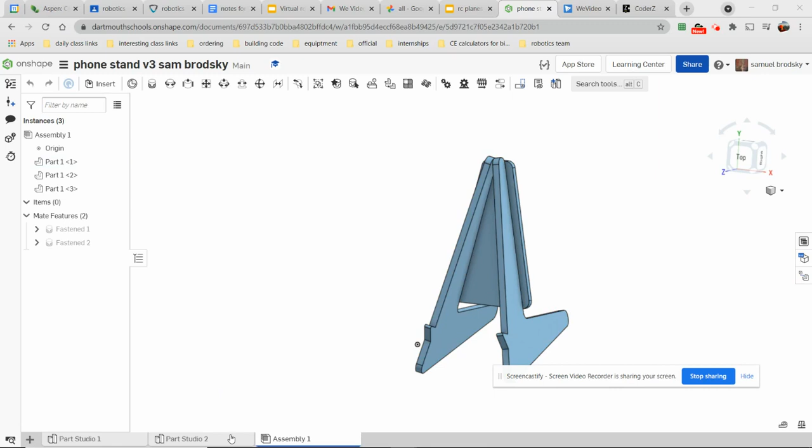So I'm going to go through how to take this phone stand that I designed and transfer the file over to VCarve so that we can actually make it cut. First thing I have to do is find the sketches. Right now I'm in the assembly. I have different parts here, Part Studio 1 and Part Studio 2. You could have drawn these all in Part Studio.

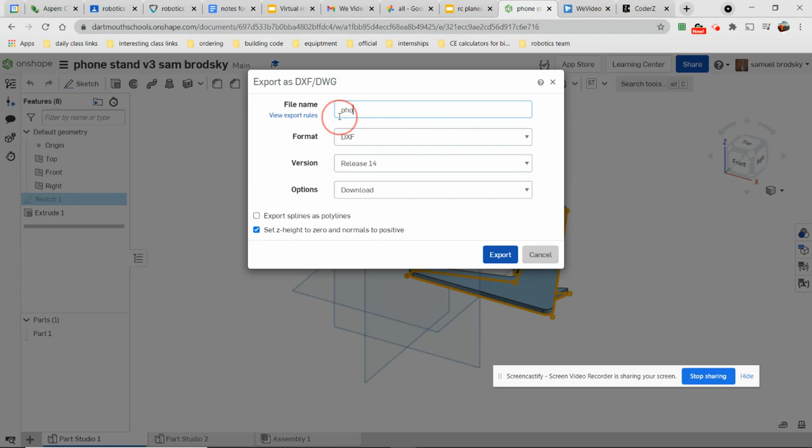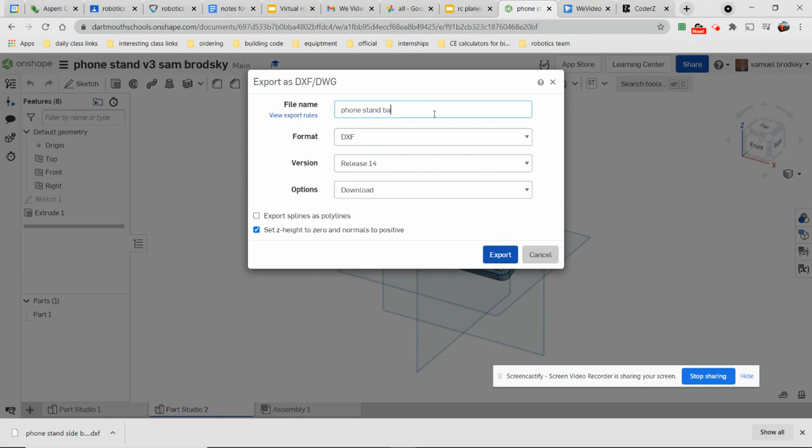Here's my sketch. I'm going to right-click on that sketch. I'm going to export that. Make sure this is a DXF. I name it. This is phone stand side Brodsky, and I will download that. Next, I'll go to my other part, and I will export that sketch as back. Make sure that's a DXF, and I will export that.

So now I have those two sketches that I've exported, and it's time to put them into VCarve. VCarve is this program here. And I'm going to create a new file, and this is where we put in the size piece of wood we're working with. The maximum size, which you should use here, 24 by 18, and then the thickness that you choose for your particular piece of flat pack furniture or flat pack object. Mine is going to be 0.22.

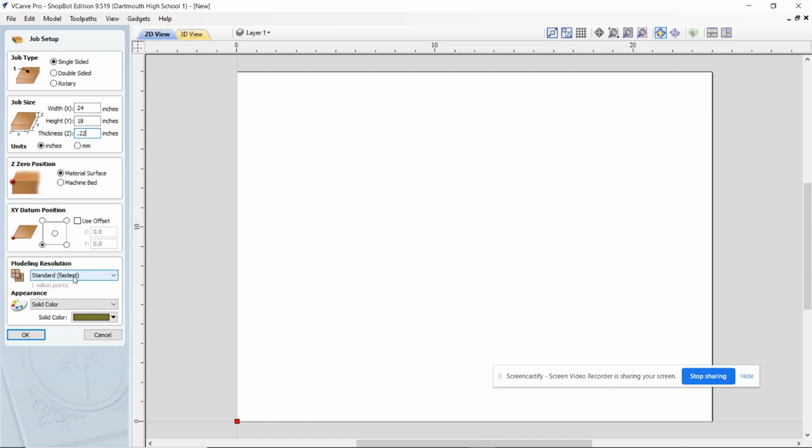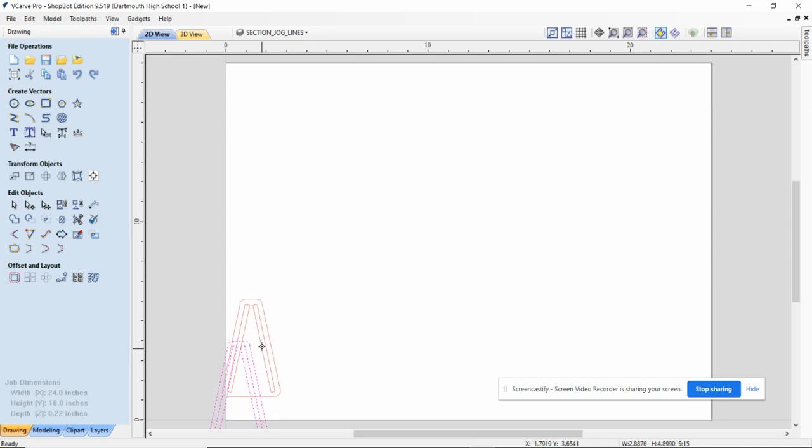The Z0 position is going to be the material surface. The XY datum position is going to be the lower left. This should be standard, and there we go. That's the basic piece of wood that we are going to be using. Now I'm going to import my sketches with this button here. First, I'll put in the back. It's going to give an error, but I'm going to just say, don't worry about it, and pop that in. Now it's in the wrong place. It's not on my wood, so I'll just double click on any one of those dotted lines and drag it somewhere where I can use it.

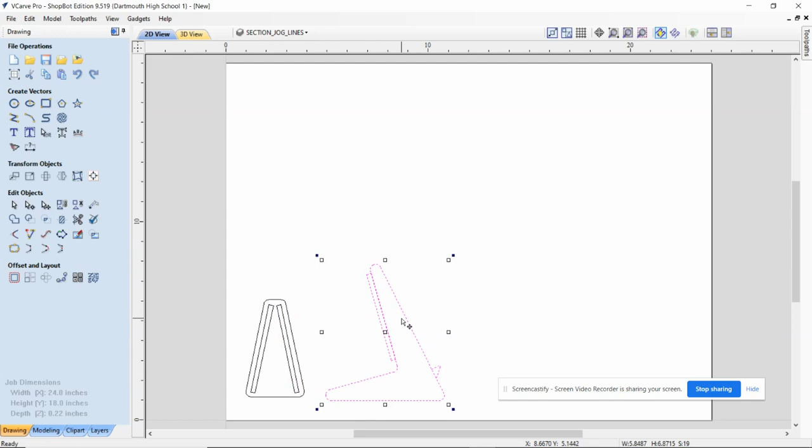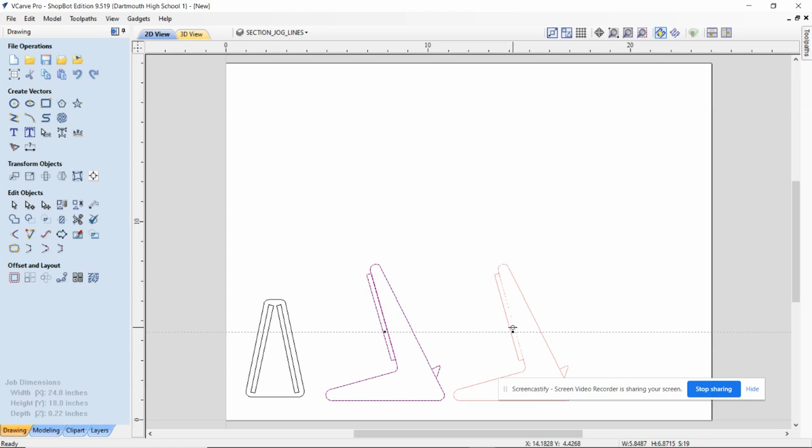Next, I'm going to import the next thing, which will be my phone stand side. Again, the error, again, I'll say OK. Double click on it and drag it over here where I can keep it out of the way of that one. Now, I need two of these. So I could import it again, or I could double click on this, right click on this, copy, and then paste. Now it pasted right on top of the other one, so I have to grab it and drag it off to the side. All right, so now I have my three pieces that I'm going to use to make my phone stand.

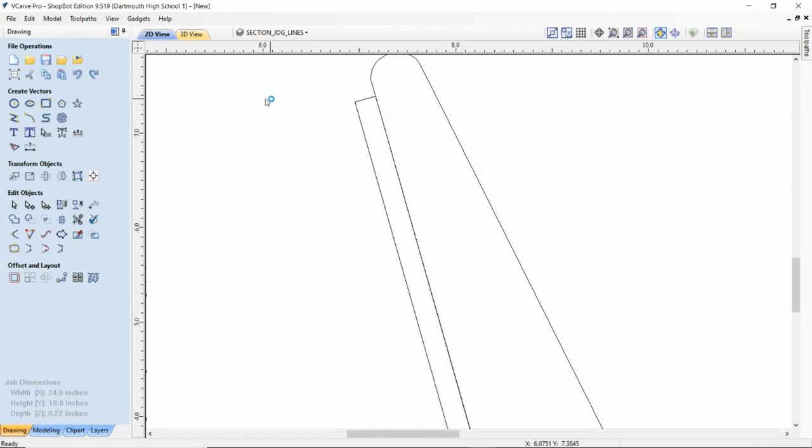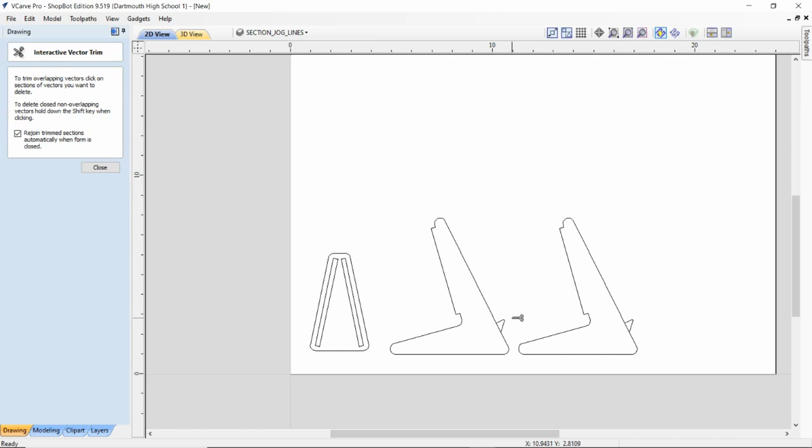Right now, they came in as separate lines because that's how Onshape drew them. What we need to do is clean this up and connect them. We don't need a separate line here. So I'm going to use the scissor tool, trim tool, and trim this line away. There were two lines, I had to trim them both. 1, 2. And when it did that, it actually connected those pieces to here, which is really useful. We still have to connect everything together. Scissor tool again, because I have to get rid of this little line and this little line. Anything that's not getting cut by this machine has to disappear.

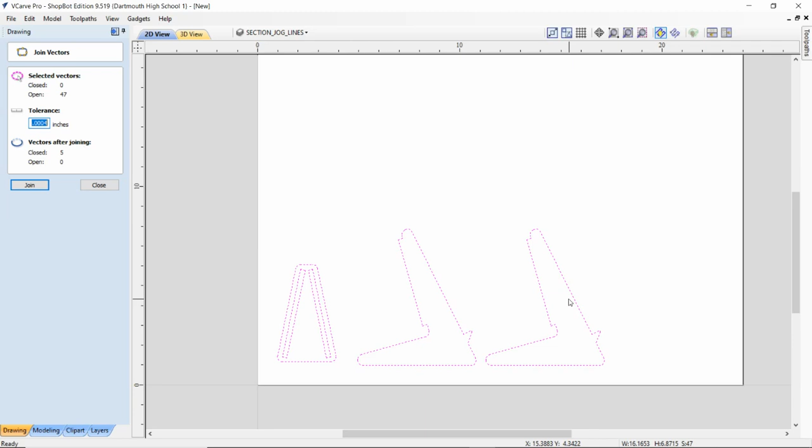All right, now I'm going to connect them all together. As I noted, they're all separate lines. What I have to do is select everything. I could do that with a big box, or with a Control A. And I'm going to use the join vectors. Initially there are 47 vectors. Once it closes them, there'll be 1, 2, 3, 4, 5 vectors, the vector being a continuous line. And now they are all closed, so I can't trim anything anymore. Now if I click on them, you see it's like one big piece. One big piece, one big piece. One hole and another hole. Very good.

Now it is time to start thinking about cutting these. So I'll click here to get over to my Toolpaths tab. The first toolpath I'm going to cut is this slot right here, so I'll use a pocket tool for that. I'm going to cut 0.27, which is deeper than my material of 0.22, which is correct. That way I'll cut right through it. And I'm going to use a 1/4 upcut wood bit. That's a perfect bit. I can select right there.

Don't change any of these settings unless I tell you to. Ramp on the plunge down is usually a good idea. Probably not necessary here, but I'm just going to leave it alone. Now I have to choose what I'm going to cut. So I'm going to click on this. I want to click that one too. In order to select them both, I will hold down the Shift key while I click the second one. And I will name this toolpath slots.

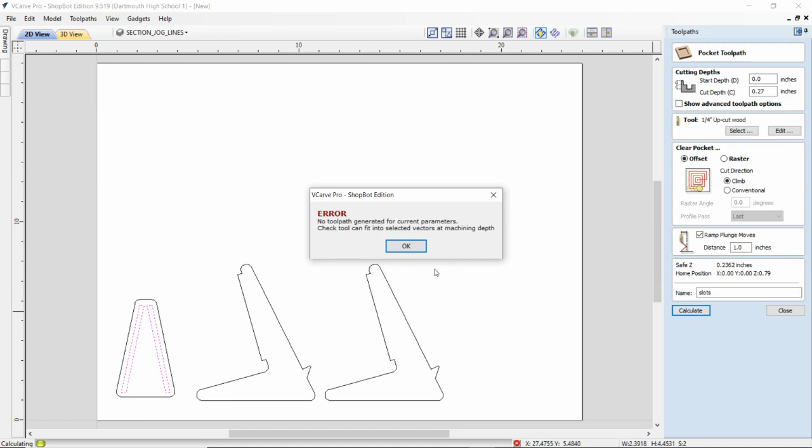Okay, so here it gave me an error. Let me try that again. The error is saying the tool can't fit into the selected vectors at the machining depth. I'm trying to cut a slot that's 1/8 of an inch or 0.22 across, and I've got a tool that is 1/4 inch wide. So instead, I'm going to actually select the 1/4 inch, 1/8 inch upcut wood.

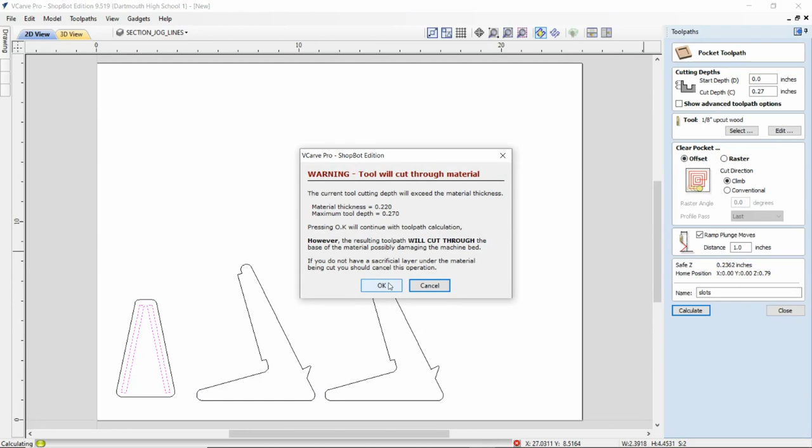And now I'm going to calculate. It's going to say, "You sure?" I'll say, "Yeah, man, no problem." So now I can preview these selected toolpaths. There we go. That's perfect. I will head back to my 2D view.

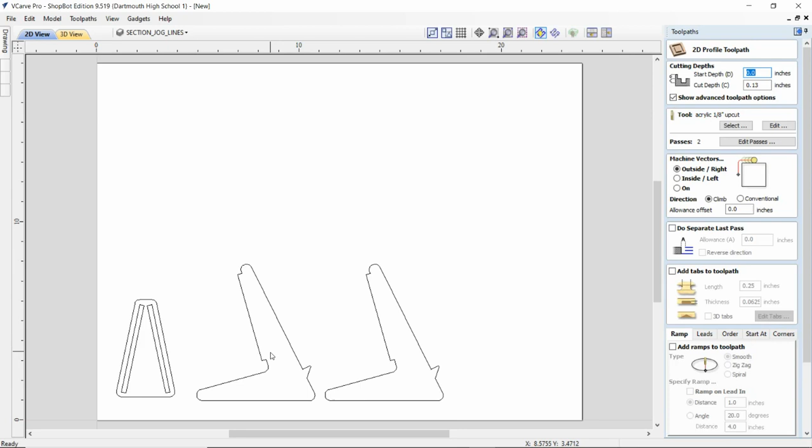And now it's time to create a toolpath for the outside. So I'll close my preview, select my 2D profile toolpath. The profile toolpath cuts the outside. The pocket cuts the inside. I will shift select all of my outside parts. And I will, man, I had the wrong tool there, I think. Yeah, that's the wrong one. I want the 1/8 upcut wood.

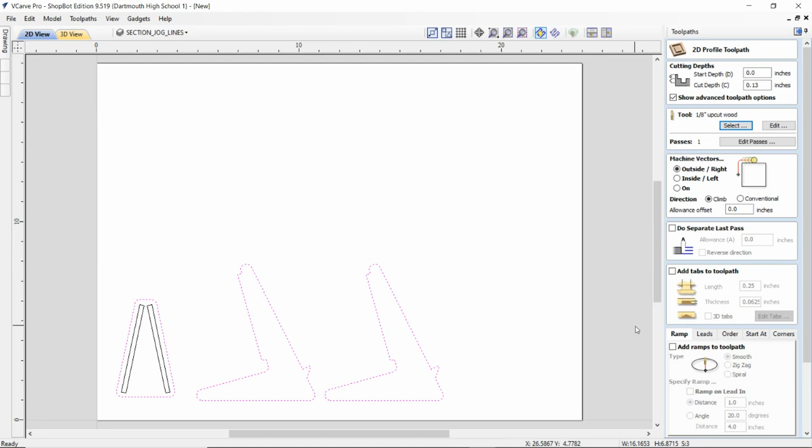Now the problem is, I guess I can just leave it in the 1/8. I could switch over to the 1/4, but it's not that big a deal. We don't need advanced options. We are going to cut on the outside. We will ramp our plunge moves 1 inch. We are going to need tabs.

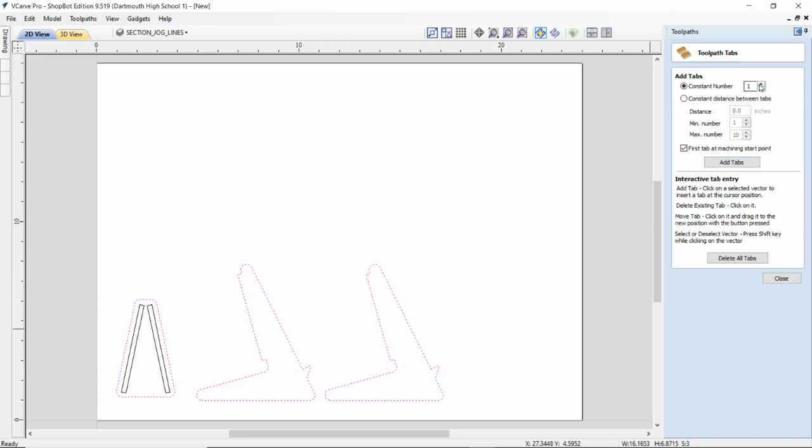The reason we need tabs is that otherwise, as the machine cuts out the piece, it'll start moving around. It will destroy the piece, and it may crack the bit. So we're going to add some tabs. 3 tabs is good for wood. Press add tabs, they'll pop in. If they're in a bad place, you can move them here and resize them, but I think they're fine where they are.

All right, I'll close that. And this one will be the outside cut. Calculate that. And I'll preview them all again. Uh-oh, it didn't cut all the way through. Let's check what I forgot. Outside. It's an outside cut. And I only cut it 0.13 deep. I need it 0.27.

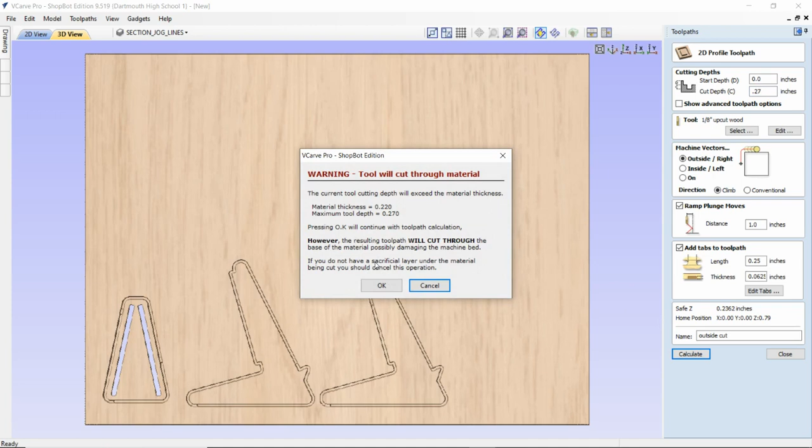And I will now calculate. Oh my gosh, do you really want to go all the way through? Absolutely. I can reset my preview, and I can preview all the toolpaths. And there we go. It's cut all the way through. It's left these tabs to hold stuff in place. Now, the only thing I would like to do here is save some material. Otherwise, we're ready to cut.

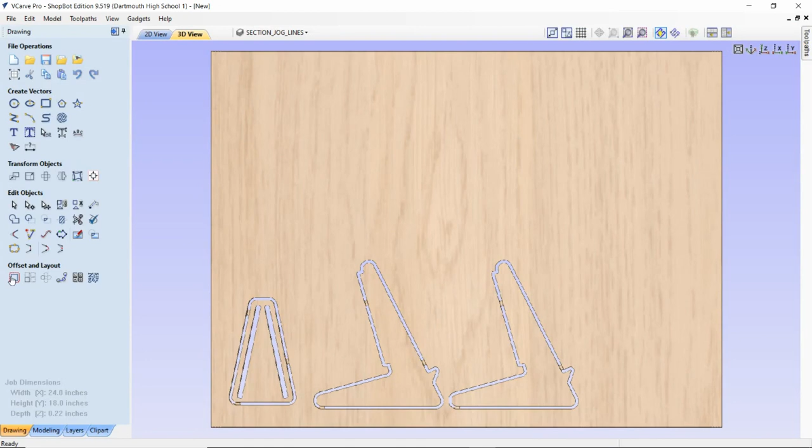Well, almost. Two things we have to do. First thing, save some material. So if we go back to the 2D view, I can select these, and I can try to nest. Tool diameter is 0.125, and the clearance is 0.125. And the border gap on the outside is 1 inch.

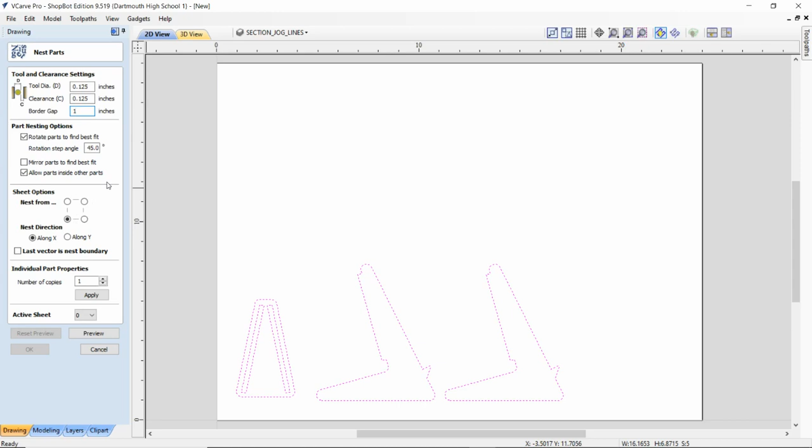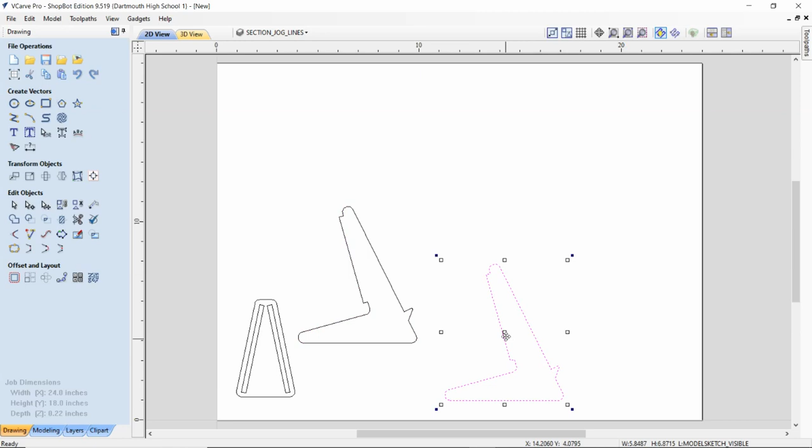That didn't really help. So we can move this around by hand. And if we just select it, double click, we can drag, and I could do something like that. And then something like that. That saves a little material, right? Not a big deal, but you could, and then I could mess around with this further, and I probably will before I cut it.

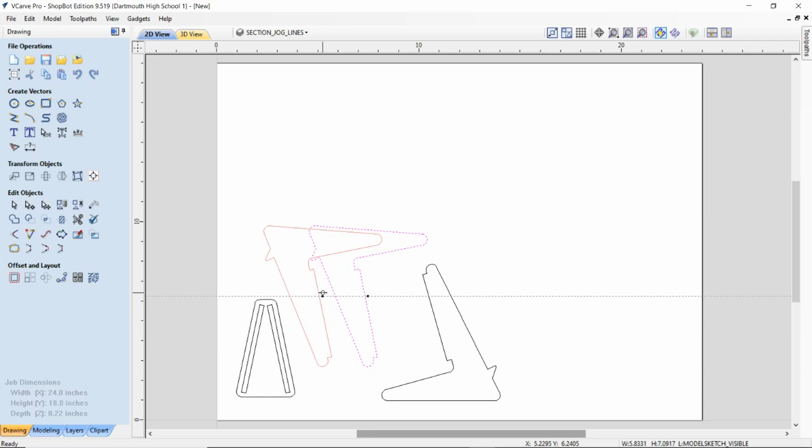Okay, good. Let's see, I could rotate. Yeah, there we go. That's a good idea. And then I can drag this over here. And then I can drag this over here.

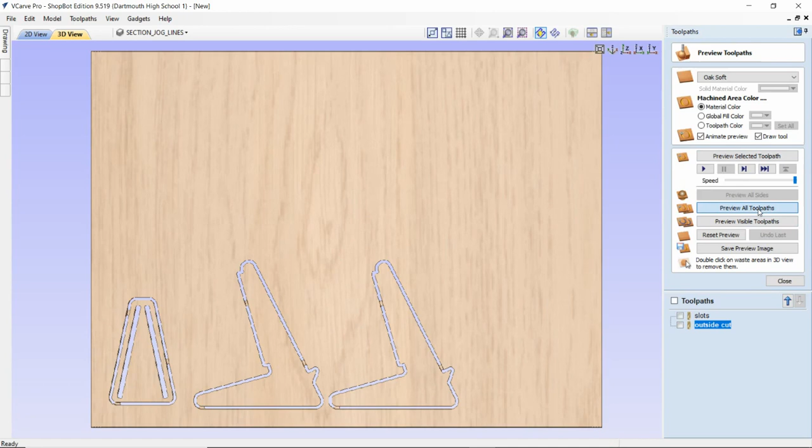All right. And now something strange happened, because when I go back to my 3D view and preview my toolpaths, it didn't change. That's because I didn't reset the preview and I didn't recalculate the toolpaths. So because my toolpaths moved, I now have to recalculate them. It shows me the new place. And now when I preview all my toolpaths, here they are in their new place. Beautiful.

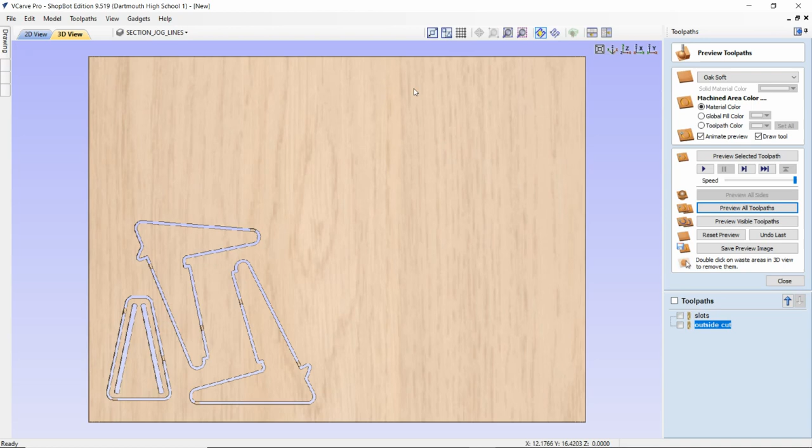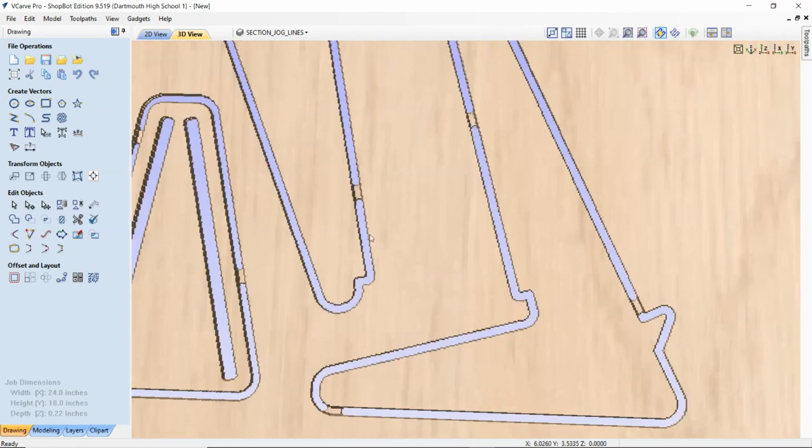Now the only thing remaining is a problem we have with mortises. You notice how the edges of this are round. The edges of that are going to be square. Right? We won't have that rounded edge here. That'll be a square edge. This right there will be a square edge, and this will be a round edge. So that will be a problem. And there is a solution, luckily, and a fairly easy one.

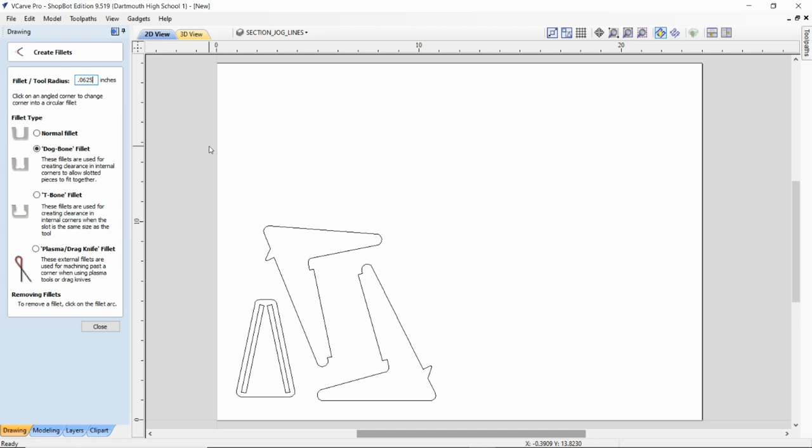We have to add some what are called dog bones. So dog bone fillets. So we'll go add a fillet. We can add a dog bone. You can also use T-bones. I prefer dog bones. My tool radius, that's half of my tool diameter. So my tool diameter is 0.125. The tool radius is 0.06. Now this might be different for you. And the dog bone is going to happen on each of these corners.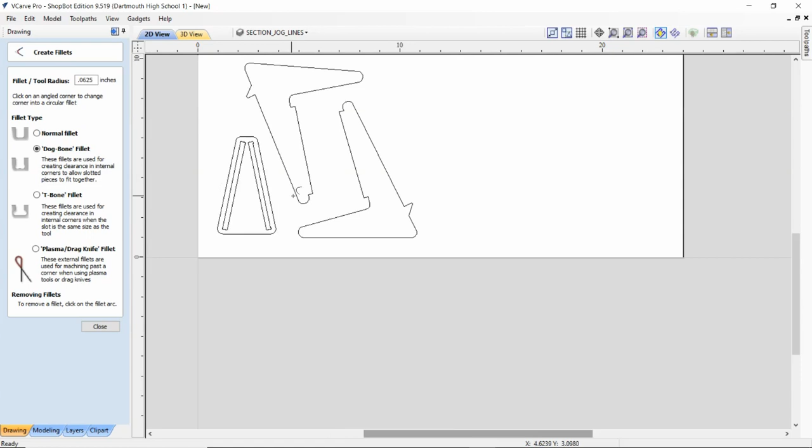1, 2, 3, 4, 5, 6, 7, 8. And it's also going to happen on the interior corners here, and here, and here, and here. All right, and now I can check, I can preview, right? I'll reset my preview, preview all my toolpaths.

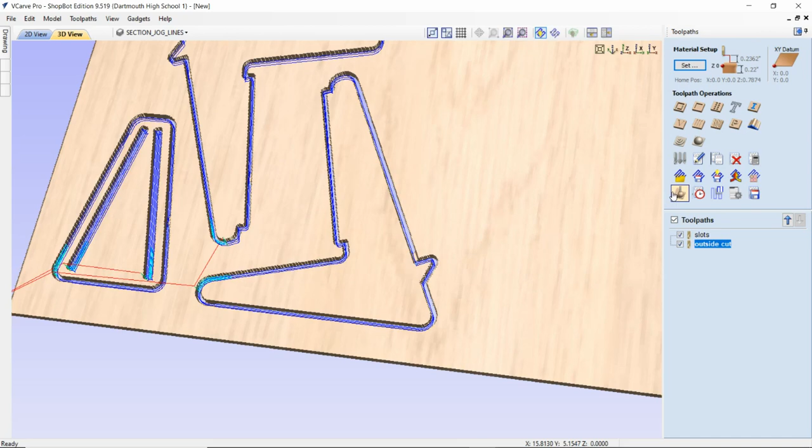I don't see a dog bone. Oh, what I forgot to do is recalculate the toolpaths. Yes, it's okay, they cut through. They've all been recalculated. Back to preview, preview all the toolpaths. There are my dog bones right there. Perfect. All right, we are almost ready to be done with this guy, but what we have to do now is not waste quite so much material.

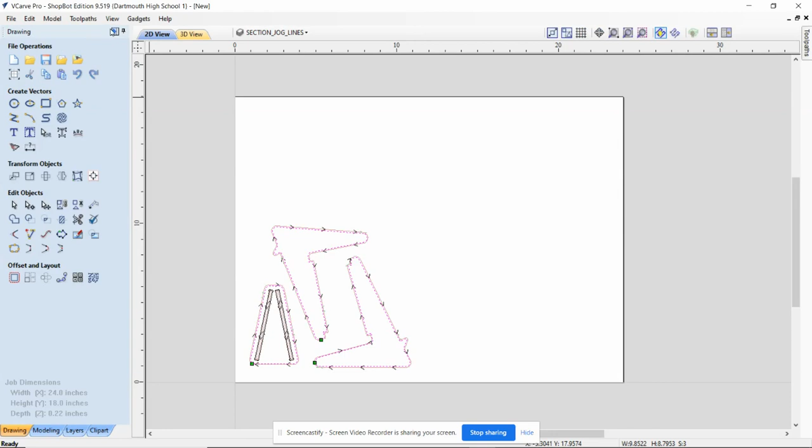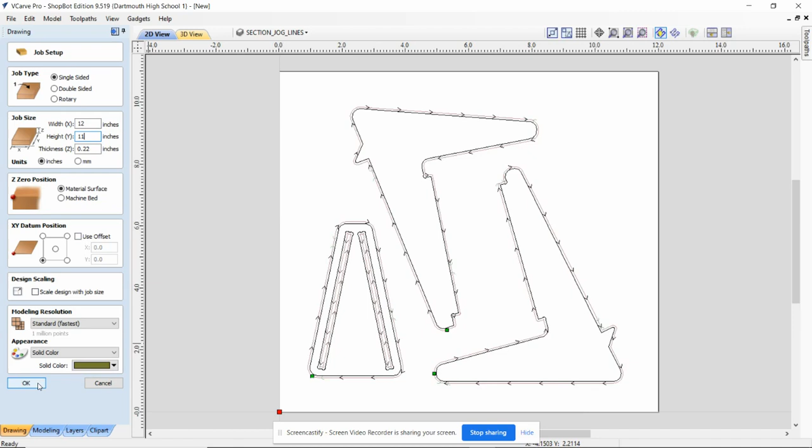So I'm going to go back to the drawing tab and into the job setup, and I'm going to set this at about 11 inches high and about 12 inches wide. So that's 12 inches X, and that's 11 inches Y. So now I know the basic shape and size of the piece I'm going to use, and I'm not going to waste excess. It's going to recalculate all my toolpaths.

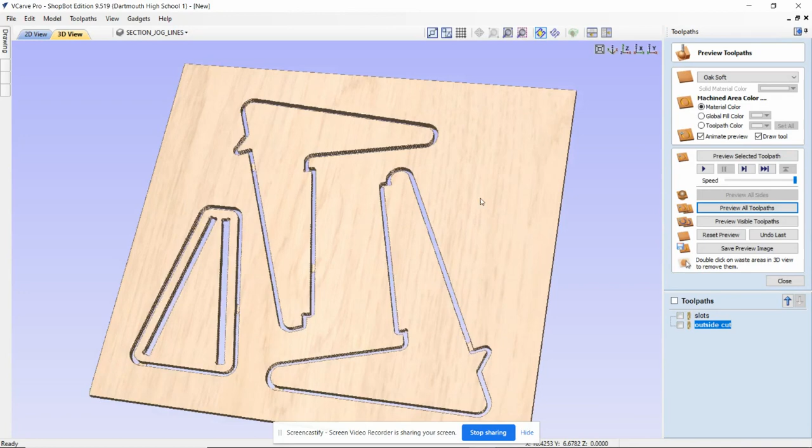And it's time to save all my toolpaths. So to save all my toolpaths, I click on this guy right here. Save. Well, let me hit my preview and make sure everything works great. Oh my gosh, look at that. It's amazing. Can't wait to use it.